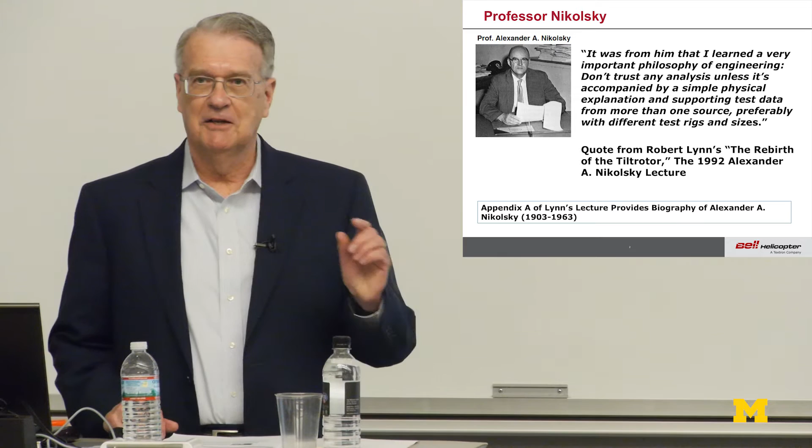So the question is, how has that fared over the years? Because one thing we wanted to do was constantly improve our analysis. And just for the future, one of you individuals sitting out here today may be giving this lecture in the future. And if you ever want to know who Professor Nikolsky is, you can go to Bob Lynn's 1992 Nikolsky lecture, and there's Appendix A in there that completely talks about Professor Nikolsky.

However, we made a mistake. At the time, we didn't know we made a mistake, of course. But what we did, when you look at the tail rotor, if this is a vertical fin, we always have a sign convention. Which way is the top blade going? Is the top blade going forward, or is the top blade going aft? So it depends on which way you orient the tail rotor.

So unfortunately, we made it so the top blade was going forward. We thought that was really cool. We'd couple up with the dynamic pressure from the main rotor. It'd be great. However, when we were in Vietnam, we quickly learned that when we had a tailwind, we had a real problem. We had a control problem.

And we lost a lot of tail rotor thrust. So finally we began to understand that the ground vortex that's formed on an aircraft when you're in rearward flight can actually subtract from the dynamic pressure of the tail rotor. So we're in a pickle. We need a design change quick.

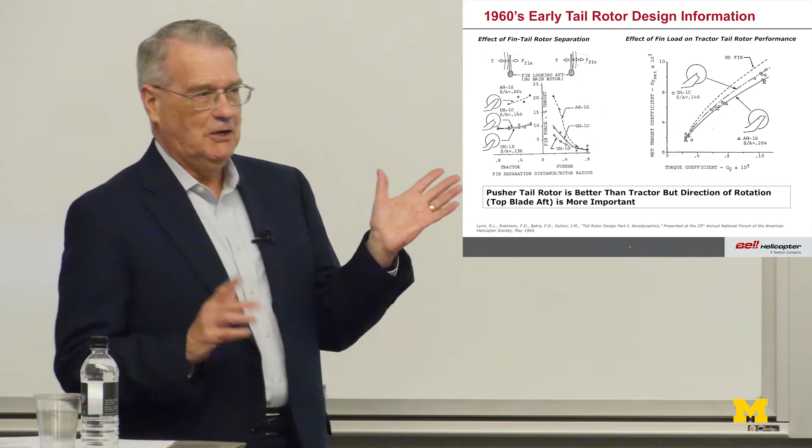So being innovative, someone thought of—it wasn't me—that what we would do is simply flip the tail rotor from the pusher side to the tractor side. That had two advantages: I got a top blade going aft on the tail rotor, and I didn't have to change the gearbox. So just by flipping it over, we were able to solve that problem. We learned a valuable lesson: from then on, tail rotors should have the top blade going aft. Today you wouldn't think anything about it because you look in the literature and see that.

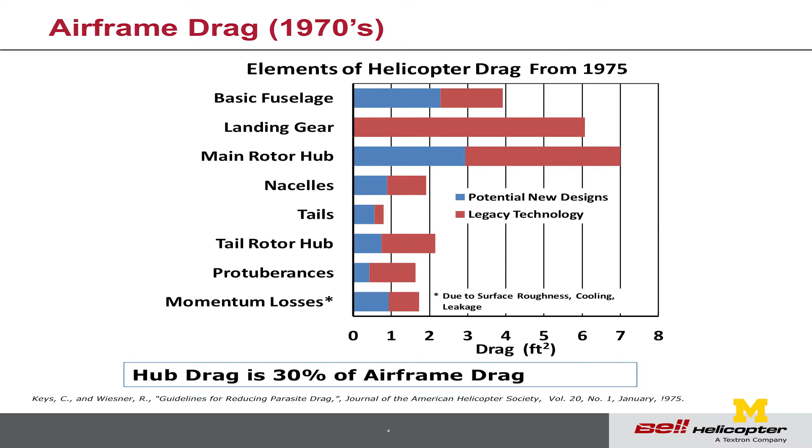Another real important component of helicopter performance is the drag of the fuselage, the drag of the hub, the overall drag of the aircraft. Wiesner and Keys did a really interesting paper in the early 70s where they show the components of helicopter parasite drag. When you look at this, you can see the big offenders: the landing gear, because back in the day we didn't retract it, or we had skid gear. The basic fuselage, main rotor hub, nacelles, tails, tail rotor hub, and protuberances and momentum losses.

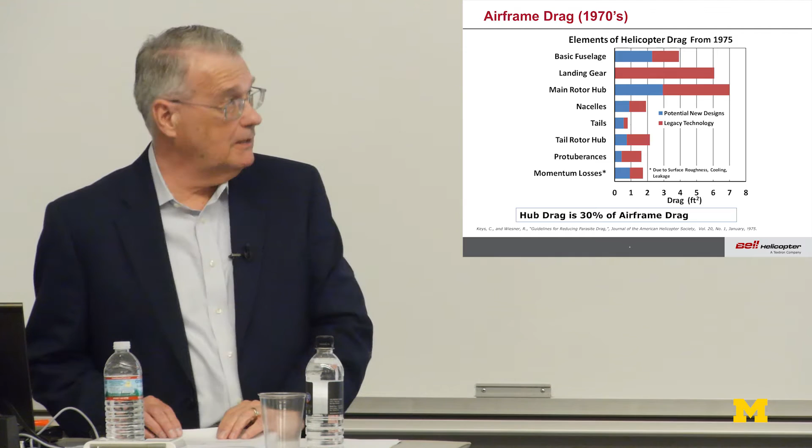In this particular chart, the red is the current status of where we were in 1975. The blue is where they had hoped we could actually get to. Now call your attention to the landing gear—we suck up the gear today, we've sort of worked on that, but you still have a pylon of some kind unless you can make it go into your fuselage. So that piece has been worked on. I want you to look at the main rotor hub, because through the history of the next few years I'm going to show you that the hub keeps coming up as people look at it. So the interesting part is, what is that drag? You can see that drag is a big player in the parasite drag of a helicopter.

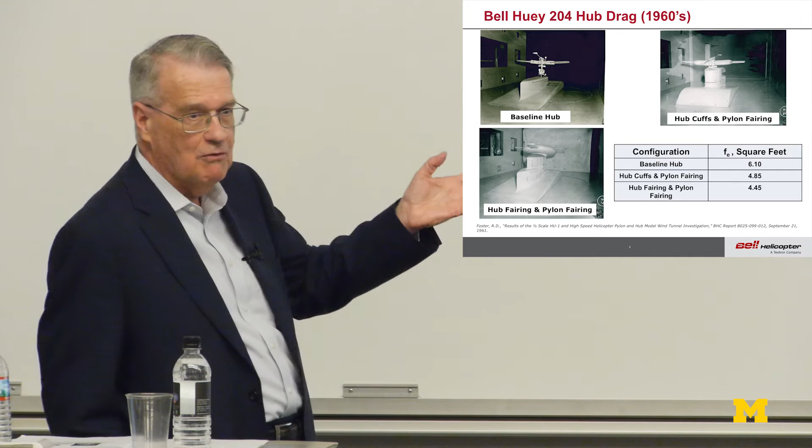So I'm going to look at some of the early stuff that we did. At Bell in the 60s, we were trying to find out how to get a helicopter to really go fast. We took the conventional two-bladed rotor, shown in the upper left-hand slide, and we tried different things. We put a pylon that would cover up the rotating controls, we put fairings around the cuff, we even put this giant ellipsoid on there. You can see in the lower right-hand side the effect—we made about 1.5 foot gain out of that. However, with all that stuff up there, the pilot can no longer see the rotating controls, and he can no longer check to see if there are any interferences. As a result, it never made it onto an airplane, never went into production. So that information was out there.

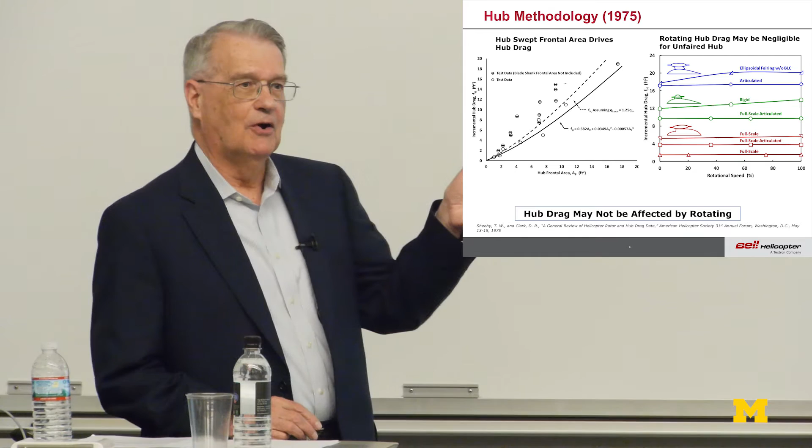If you go to the mid-70s, Tom Sheehy from Sikorsky did an in-depth study of what really affects hub drag. On the left you can see the hub frontal area versus the incremental drag, and what he determined was that if you take the profile area, you could pretty much estimate it. However, there was a big controversy about whether you needed to rotate the hub in the wind tunnel test, or if you could just do it statically and index the hub. When he looked at it, there was a variable answer there—he wasn't sure what to say about that. At that point he concluded that hub drag may not be affected by rotation, because if you rotate, you have a more complicated test to run.

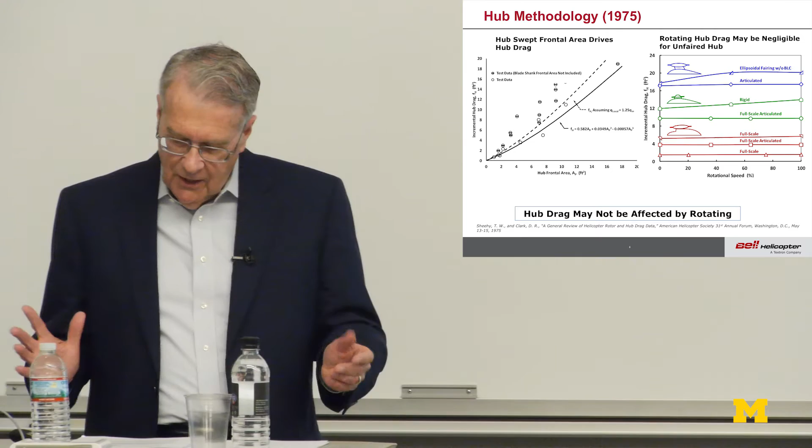So we talked about the hub—how do we do this? We always had these small scale tests, depending on where you test. If you're in a 7x10 tunnel, it's usually a fifth-scale model. So let's look at some small scale stuff. At Bell, we had the Model 222.

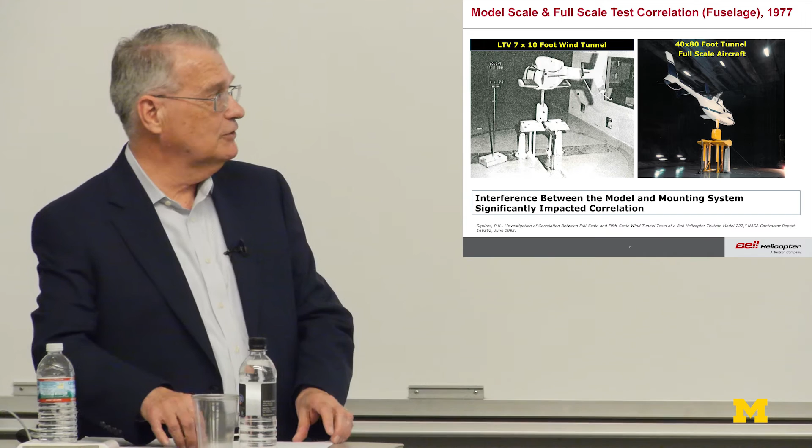So we came back and asked ourselves, what could be wrong? Well, anybody that does force and moment tests knows about tares and interferences. You have to do the image—you've got to flip it upside down and get your model data. So we went back to the LTV wind tunnel, 7x10, and we actually built exactly the same mounting system that was used in the 40x80 wind tunnel. We did tares and interferences on that test, and we flipped it upside down.

Once we did that, we correlated very closely with the wind tunnel data between the small scale and the large scale wind tunnel. So the lesson learned here is you really have to do tares and interferences, and you really have to pay attention to how that thing is mounted in the wind tunnel, even if you're in the 40x80.

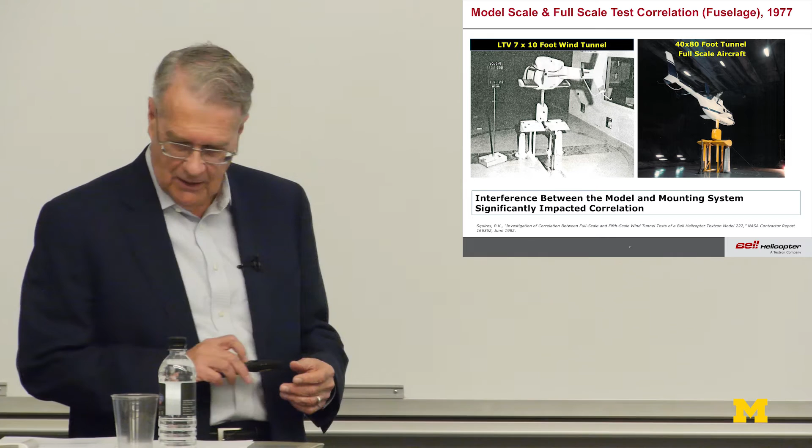So we talked a lot about drag and determining that. Now let's talk a little bit about performance.

In the late 60s and early 70s, the only performance data we really had was momentum theory, a Gessow and Myers type approach. We used to have some factors that we would apply to the induced power and things of that nature. So we got to looking at two places.

Two places you're really interested in calculating performance are the minimum power—in the speed power bucket where the power is minimum. That has two significances. One, that's where you do all your rate of climb testing to see how fast you can climb. The second thing: if you're a twin-engine aircraft, that's how you determine your single-engine stay-up capability. It's really important because, early on, you promised somebody this airplane could stay up single-engine to 4,000 feet on a standard day. So if you miss that power, you can really be in trouble.

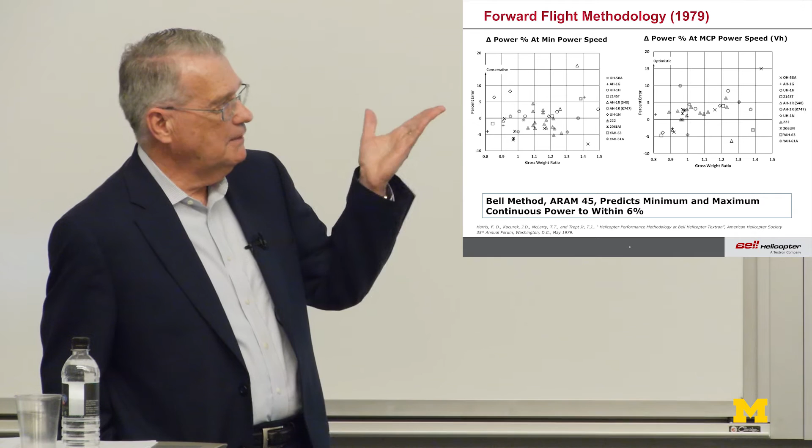So we went and looked at a bunch of things. We put some trim models in our code, but it was still momentum theory. As you can see in the minimum power case, we were maybe close to a 3 to 5% problem. In the forward flight case, we were overly optimistic by about 6%. So this was still a big problem for us, and we really wanted to understand what we needed to change in the methodology for forward flight.

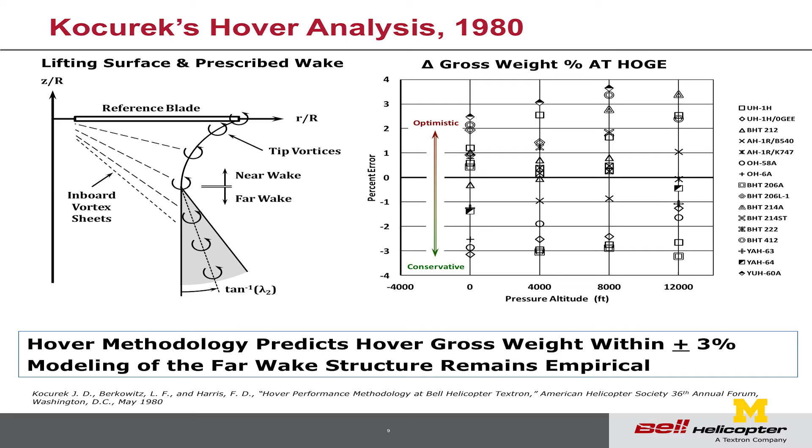However, before I go there, I want to talk a little bit about hover data. Remember, our early hover models were simply momentum theory. The thing you have to realize about momentum theory is that it captures the fundamentals of the flow really well, but it gives you no details of the flow. You can have a stream tube and know how much momentum passed through it, but you don't know how it's distributed inside that stream tube from momentum theory.

So Landgrebe at Sikorsky, Tangler at Bell, and Kocurek at Bell spent a lot of time and visualized flow—took a lot of tufting and other flow pictures—and we began to see how the rotor wake actually contracts and then diffuses again. This is what we began to develop, based on the aspect ratio of the blades, number of blades, and different parameters, to try to come up with a prescribed wake. A prescribed wake means you tell it what it looks like, but you don't calculate a wake—you just position it, and thereby you get the correct inflow angle at the rotor blade in hover. At that time, it was sort of expensive to run this, so we tried to get workarounds.

But anyway, we went to work on it, and we thought that we could pretty much get our hover methodology to give us the actual gross weight at a given altitude that I could actually lift in flight test within about plus or minus 3%, which was fairly decent at that time.

One thing that Kocurek found, since I was always in handling qualities early in my career and I designed tail rotors, was that a main rotor is like probably 16 to 17 aspect ratio. A tail rotor is an aspect ratio of 5 to 6.

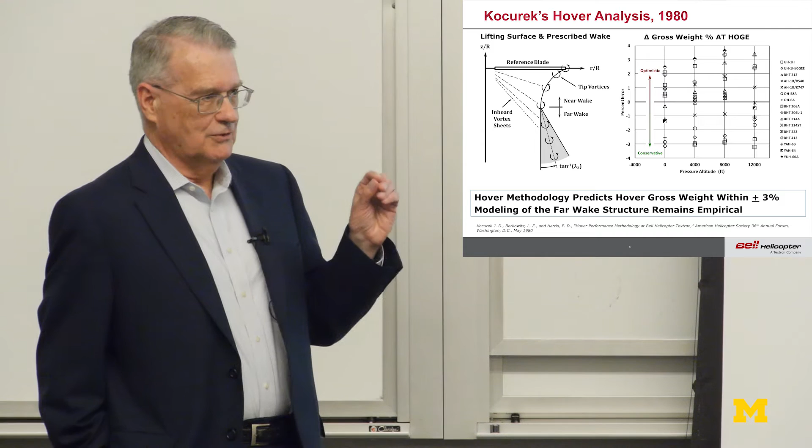So when you design it, so you could get the thrust and power right, you could figure that out, but could you figure out the blade angle? What Kocurek's code did that our momentum code could never do was change the lift curve slope properly so we could actually calculate the required blade angle to go sideward flight correctly.

So aspect ratio is a big deal when you're doing tail rotors, and you need to make sure you understand that issue when you calculate the blade angle. Because remember, you design a rotor hub, the blade fits in the hub, whatever you design in, that's all you get at the end of the day. You don't get to throw it away and go buy a new hub. Program managers get real upset about that if you tell them that.

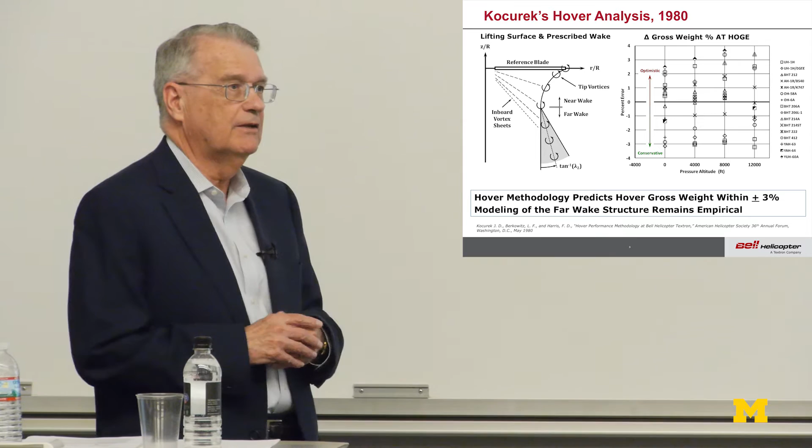So now I'm going to switch to a subject that's a little different, because there are usually many static tests you can run, many qualification tests that we ran on aircraft, and many pieces that go into aircraft design and actually flying the airplane. However, sometimes you really have to go into the dynamic environment, and we're going to talk about something I had to do in that dynamic environment.

So in the early '80s, we started getting a lot of reports and reading in the media about something called tail rotor stall and tail rotor breakaway. There were certain situations where people believed the tail rotor was actually stalling on them, and some people thought the tail rotor quit producing thrust when it stalled. And so there was a lot of stuff came out.

So suddenly the Army changed the emergency procedure that said if you start spinning to the right out of control, you should reduce your collective pitch, which will reduce the torque. You reduce left pedal, which meant I want to spin faster to the right - I never could understand that one. And then you apply forward cyclic to try to fly out of it.

The thing that bothered us a lot was that we had fully qualified this airplane. We knew we had enough control power on the tail rotor. We hadn't experienced any tail rotor stall. So we couldn't understand exactly what was going on.

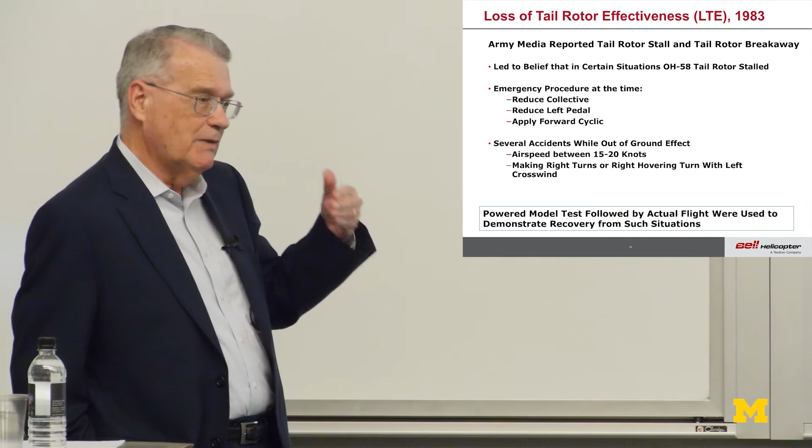There were several accidents that were really bothersome to us, and that was if you're at an airspeed between 15 and 20 knots, and you were making right hovering turns, people seemed to lose control of their airplane.

So imagine, one that I investigated - they were flying around a gravel pit up in Kansas someplace, and there was some bad activity going on in the gravel pit, so these guys wanted to see what was going on. So they flipped around, did a right turn there, and they were so busy looking out of the airplane they weren't paying attention to where the wind was coming from. And they spun out of control and crashed.

So the Army came to Bell and said, would you investigate this? So we got to asking ourselves the question, how would you actually investigate this? I said we need a powered model of some kind that had a main rotor, a tail rotor, a fuselage, so that we could begin to look and see what was going on with the airplane. So I needed a powered model to do this.

Anybody who's ever built a powered model knows it takes a long time. The best we've ever done at Bell is about 18 months. Well, I didn't have 18 months. Everybody thinks all this autonomous UAV stuff is brand new and never been done, but that's not true, because I bought the world's champion 206B RC model from the world champion for a few bucks. And what I did is I put it in the wind tunnel.

I stuck this thing on a pole, and we went to this wind tunnel test, and spun this thing. This is about 20 degrees per second yaw rate as you go around.

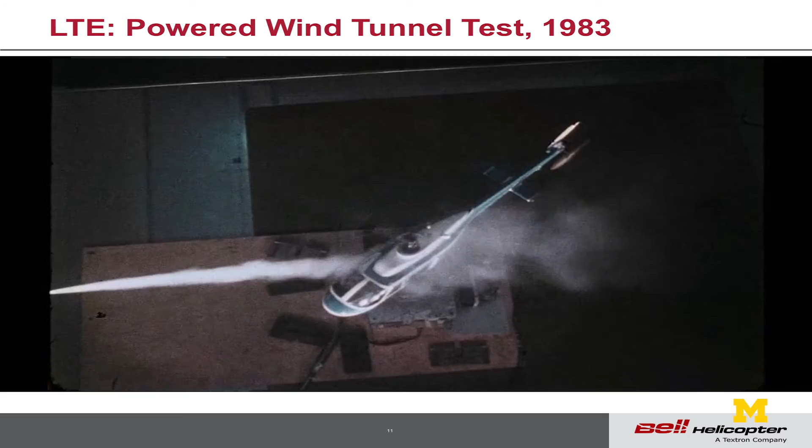I scaled the velocity to be the main rotor tip speed, an equivalent speed. And I put the wind right on the edge of the rotor, so you can see how the tip vortex of the main rotor blade actually affects the tail rotor.

From this, we began to look and say, okay, what are the real contributors to it? We noticed from the wind tunnel, you can see on the left-hand side, the main rotor tip vortex is a region where the tip vortex will actually intersect the tail rotor.

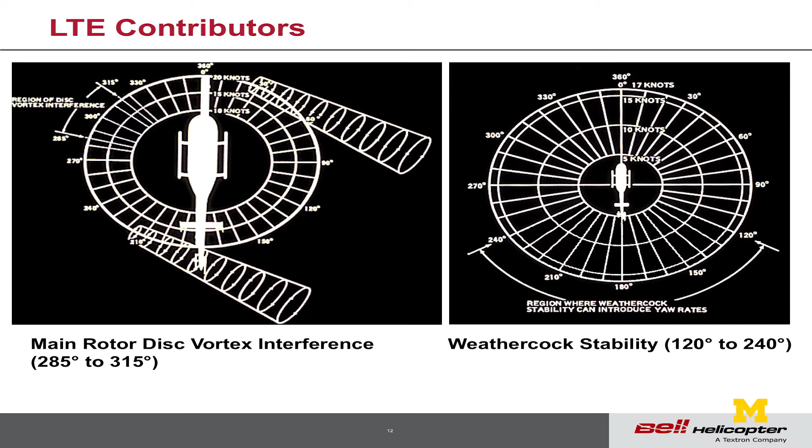So what was that wind zone? That wind zone, depending on airspeed, can vary a little bit between 315 and 285 azimuth.

Think about azimuth. What does azimuth mean? Straight ahead is either 0 or 360. This is 270. If it's coming up your tail, it's 180. If it's coming off the right side, it's 90. Just think about you're sitting on a compass, and that's the way you read this. Then these are speed bands in between.

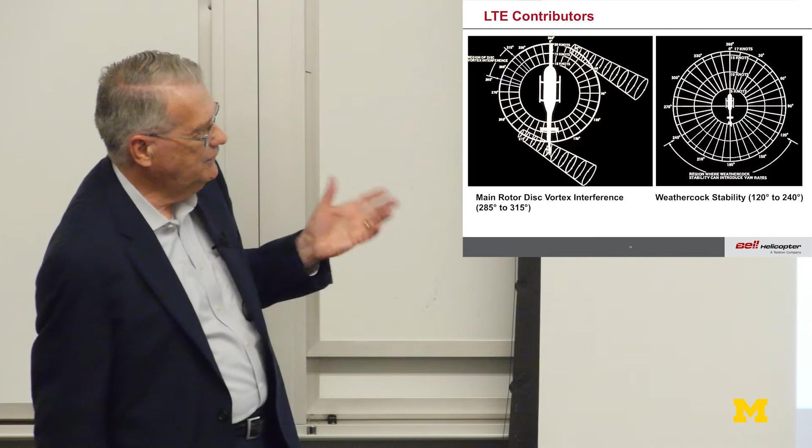So basically, we found the main rotor disc protects on the right side. We had this thing called weathercock stability. If you've heard of stability control, you put a vertical fin on a tail rotor or airplane to keep it aligned to the relative wind. And that's what it does.

So basically, if the wind was from the rear, from 120 to 240, the aircraft would want to turn around, nose into the wind, which was exactly what it was designed to do.

Then the other issue out there is tail rotor vortex ring state. There's been tons of literature on tail rotor vortex ring state. We're going to talk about it.

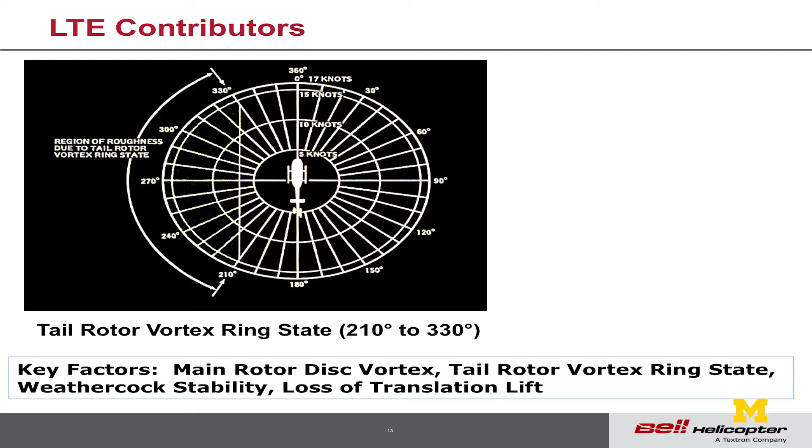In a tail rotor, what happens is you get into a certain zone from 210 up to 330 degrees at certain speeds. Basically, when the tail rotor wake becomes trapped behind the tail rotor itself, it'll begin to oscillate. It will actually break away, and then the pilot will have to make a control input to regain control of the aircraft.

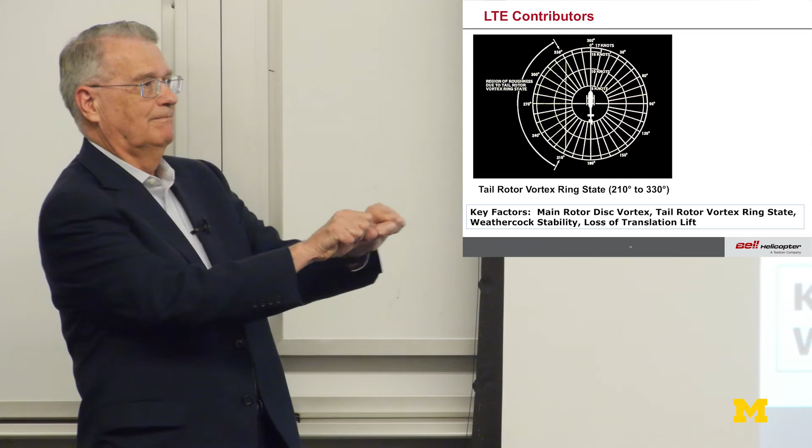So what happens if you're flying the aircraft and I tell you to point it right there: from the 270 condition, the pilot will have to move his feet like this to try to hold that heading. He won't be able to hold it very precisely, but he will be able to hold the heading.

And we know all this because fundamentally we've done flight tests on this forever. Other people had looked at that too. Wiesner and Sheridan at Boeing had done a lot of work.

So now let's see the results of what was causing this phenomenon called loss of tail rotor effectiveness. Along the x-axis down here, we have where the wind is coming from: 360 or zero is out the nose, 270 the left side, 180 off your tail, 90 off your right side.

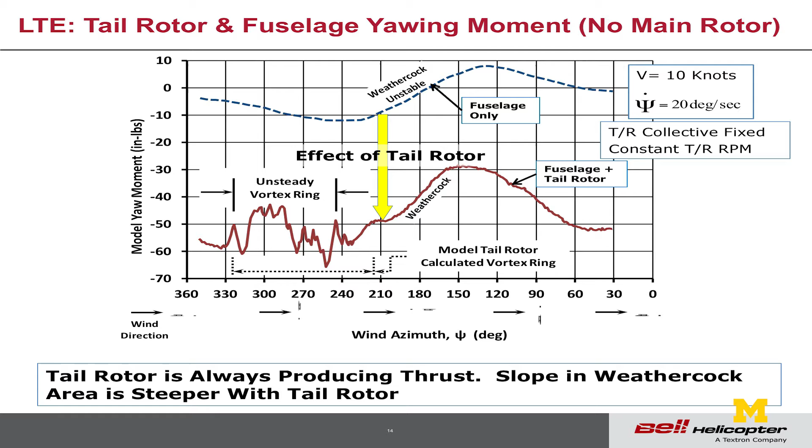So if you think about a tail rotor, we ran this test with collective fixed. So the only thing that was changing on the tail rotor itself is the inflow angle. Or if you're thinking about a fixed wing, what's the induced angle out the back—in our rotorcraft world, we call it inflow angle.

So basically, the upper dashed blue line is what the fuselage was contributing without the rotors. The red line represents just the tail rotor only, without the main rotor. You can see here that at a fixed collective pitch, all the way around the azimuth, the tail rotor really never stopped producing thrust.

However, you can see the unsteady region right there where the vortex ring state was, and then you can see where the aircraft got into weathercock stability. You can see that the slope of the weathercock stability was steeper with the tail rotor on than with the tail rotor off.

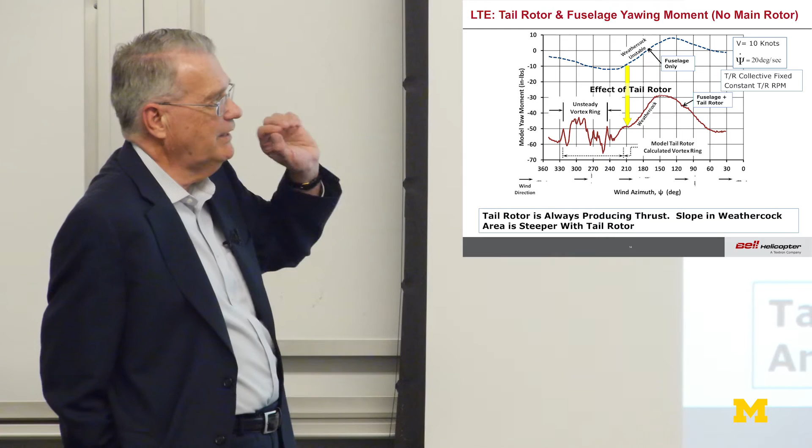So that was something we'd really never thought about. Basically, what happens is if you rotate into that area, you will actually accelerate quicker than just the basic fin, because of the tail rotor inflow angle changing during that time. So this is okay.

So we were answering the questions for the Army. We put the main rotor on and repeated the same test. This is at 10 knots, with a psi dot, yaw rate at 20 degrees per second.

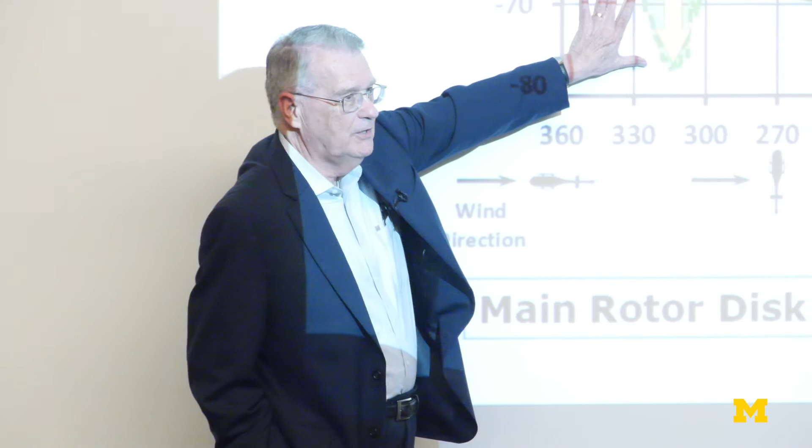About that time, the main rotor tip vortex got on the other side of the tail rotor, changed the induced flow of the tail rotor, and suddenly accelerated him. He wasn't expecting that acceleration. Then he quickly rotates through the tail rotor vortex ring state. That didn't really change. Went back into the weathercock stability and came out.

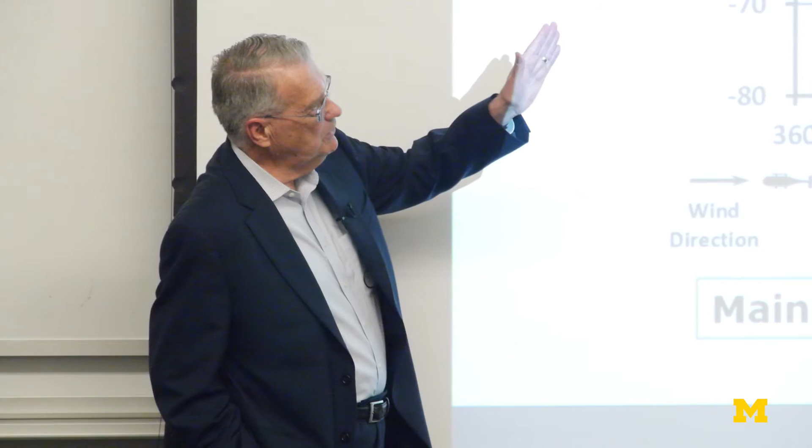So I said, okay, we got this settled, we have this solved. Well, the Army said, not so quick. He says, this is a wind tunnel test and we do not understand — was it right or was it not right? So they said, we really, really want you to go fly this in the helicopter, okay?

So as we're getting ready to go flying, I can remember my boss at the time, Jan Dries. In fact, I found this note where he wrote me in my files that said, whatever you do, do not crash the helicopter. You talk about putting pressure on you, that put pressure on you, okay?

So then the question was, okay, how do I do this? So basically, the team went together and we put together an aircraft, an OH-58. We fundamentally went and put a low-speed system in it so we know where the wind's from, and we instrumented it up.

Anybody that's ever done flight tests knows for a helicopter, you want zero wind. Well, this is one of the few times where I had to wait around for wind. I needed a steady wind to actually do this test. So in this case, we waited around and we had a steady wind of about 16 knots, which is pretty stout from a wind. And we went out and we did a right hovering turn.

Now, I got to tell you, most pilots made fun of us. Most pilots say, this is not what's going on. You know, there was a lot of deal. So I had to talk to my pilot, who's a good friend of mine — we did a lot of testing together. I said, you have to learn to let the aircraft get away from you. In other words, you have to not be the ace pilot you think you are. You have to be a sloppy pilot and be distracted and let the airplane actually get away from you.

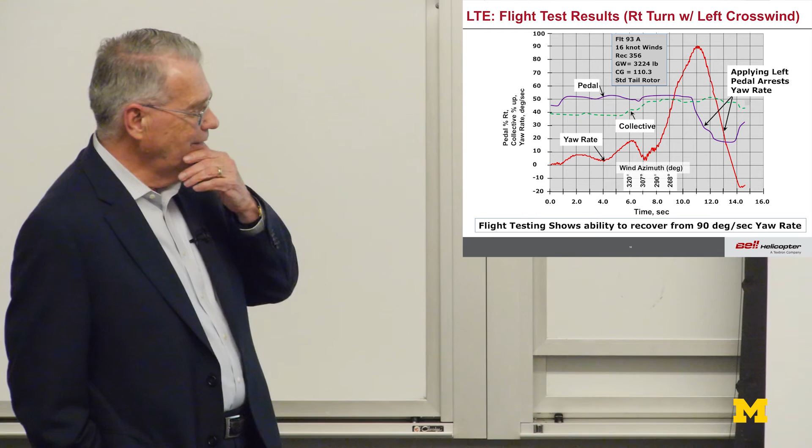So here we have several parameters plotted. Red is the yaw rate in degrees per second. The pedal is the purple, it's in percent, right? And the collective pitch is there as percent up. So you can see we went in there, we did the little test, and lo and behold, we actually accelerated up to 90 degrees per second yaw rate. And we were able to recover successfully all the way back to minus 15 degrees yaw rate.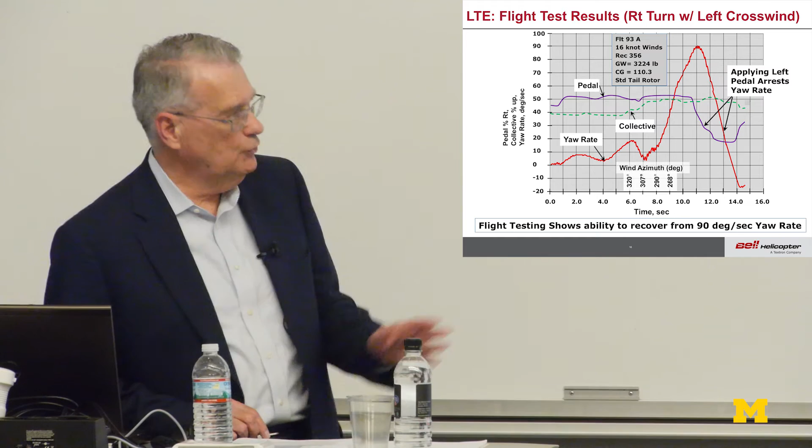So the pilot got a little more confidence out of that. He understood he had to actually let the aircraft go. So we actually went out on the runway and we did up to 90 degrees per second yaw rate, at which time the pilot was becoming disoriented visually from spinning around.

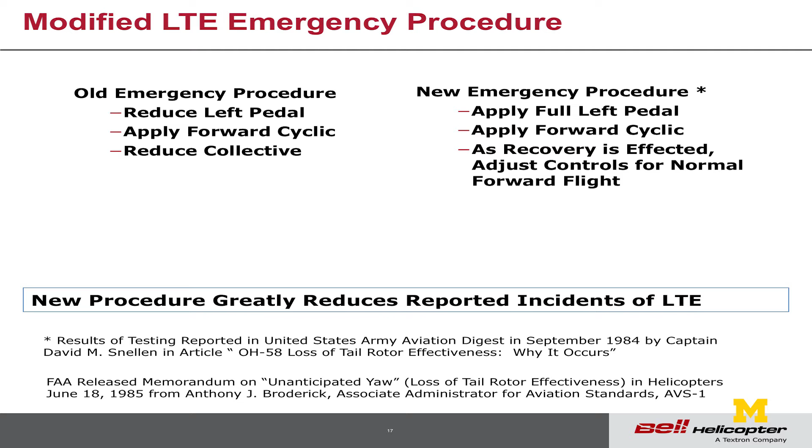The old emergency procedure says reduce left pedal, apply forward cyclic, reduce collective. The new emergency procedure, and we proved this to the Army, was apply full left pedal till you arrest the yaw rate, apply forward cyclic pitch, and as recovery is effected, then you adjust the controls for normal flight. And so basically, we actually found the answer to the question.

The new procedure did it. The Army wrote about it. Basically what it came down to, the Army put out a training film: when you're doing these turns and everything, flying the airplane - are you flying the airplane, or is the wind flying the airplane? As a result of that, the number of incidents really went away. No one could say the tail rotor was stalling anymore.

So we managed to resolve that. I'm going to move on to some performance questions that we actually had here. So Frank Harris, I invited him to come to an aero session. We had a specialist meeting at the American Helicopter Society in Arlington, and he wrote quite an epistle that he put out there. Basically, he went and took some data.

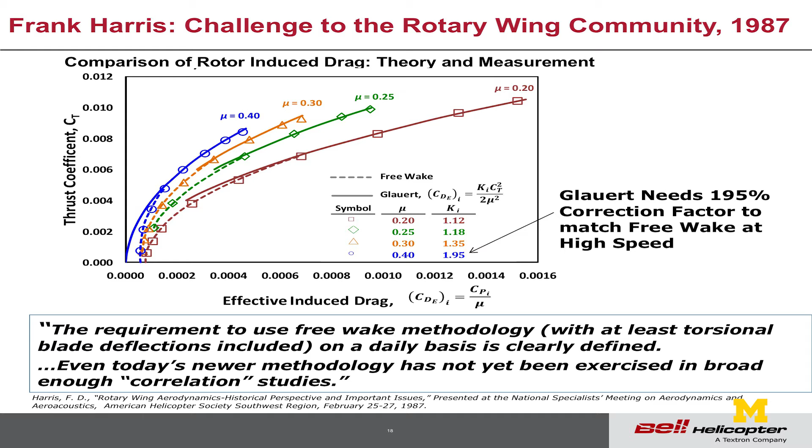We took some data from a 40 by 80 wind tunnel test of an S-76 rotor, and you can see the thrust coefficient versus the effective induced drag. The question was, how well do the test points line up with what Glauert said, and what Wayne Johnson ran with his CAMRAD code, which had Dr. Mike Scully's free wake in it. As you can see, the free wake was doing really good.

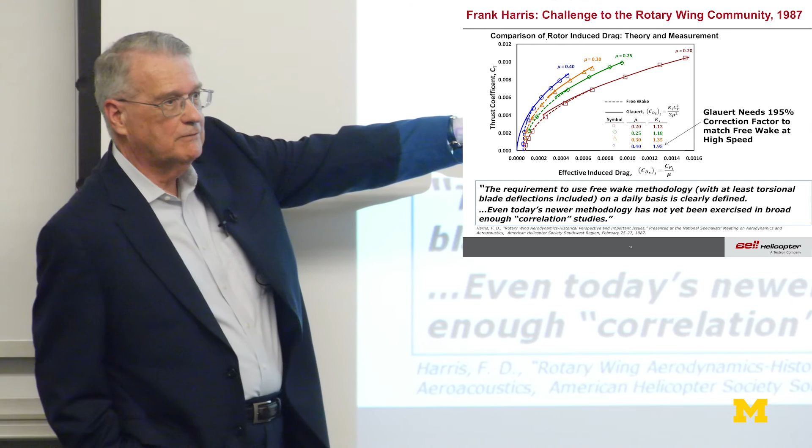I want to call your attention to the Glauert K factors. K factor at a mu of 0.4 was 1.95. So I said, if you look at his time, they thought that induced power went way down with forward flight. This shows induced power starts to come back up as advance ratio goes up.

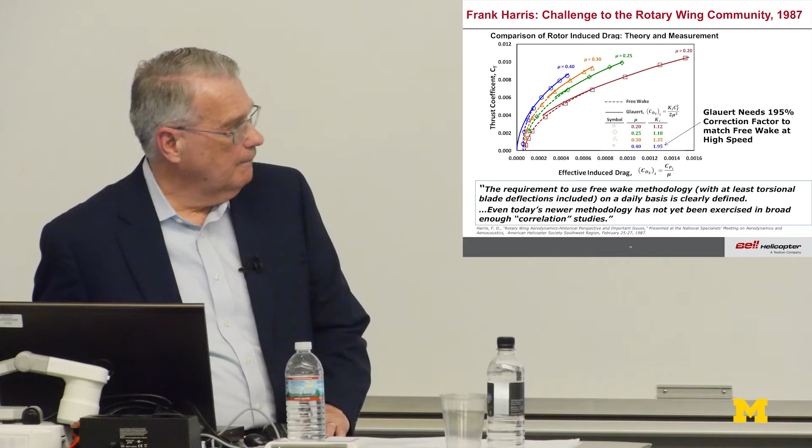And that was a significant finding, and there were a lot of obvious questions about that. So then along came Charlie Crawford. He gave us a report. Anybody that knows Charlie Crawford knows that he ran the Army evaluation for the UH-60, for the AH-64, and for the OH-58D. So he gave us a report card.

What Charlie's message was, in his Nikolsky lecture in 1989, was we need to improve our analytical capability, guys - we're not doing a good job for the customers. On the upper left, we see that everybody missed hover performance by at least 5%.

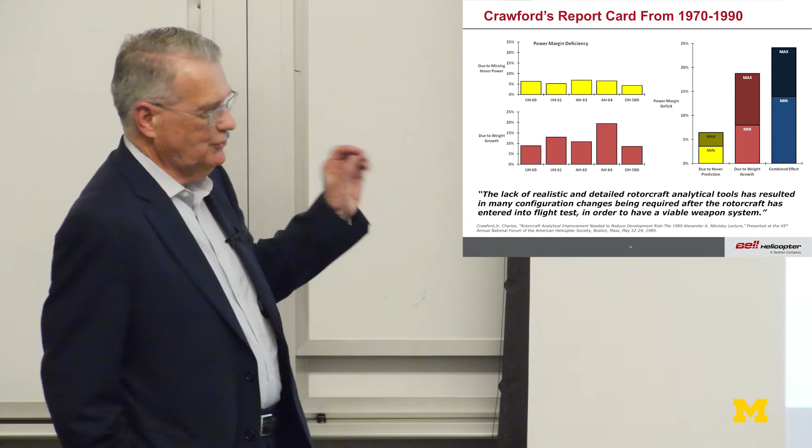Another subject I'm not talking about today - I'll be happy to see a Nikolsky lecture on this - is what's the weight growth. These comparisons are made between what you had in the proposal and what you actually flew at Edwards Air Force Base, so you can see the importance of weight. Weight was a real challenge. The best guy was just under 10%, the worst guy was north of 15%.

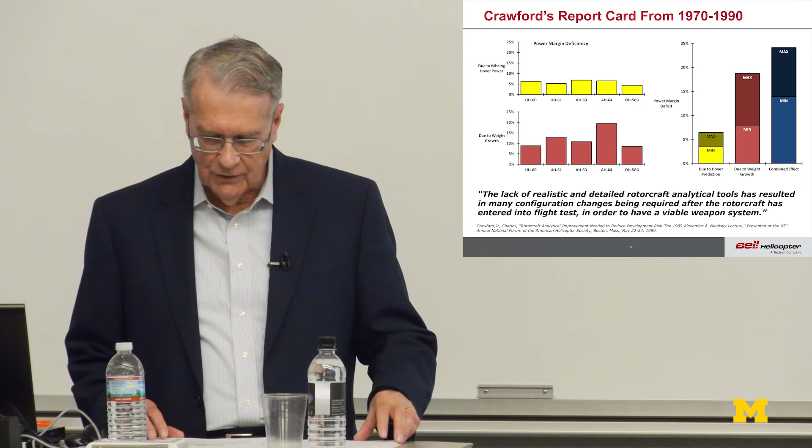So the problem with the customers - remember, I told you at the first onset, your job is to deliver a product that can have a certain performance at the mission weight. As a result of that, when you stack this up, you can see what a challenge we had in those aircraft. None of them really met the spec that was out there, and you can see you could potentially have an error as great as 25%, which would be quite a miss.

So Charlie's message was, something's wrong here, guys. We really fundamentally need to get our analysis up to speed so we know what the real answer is going to be ahead of time.

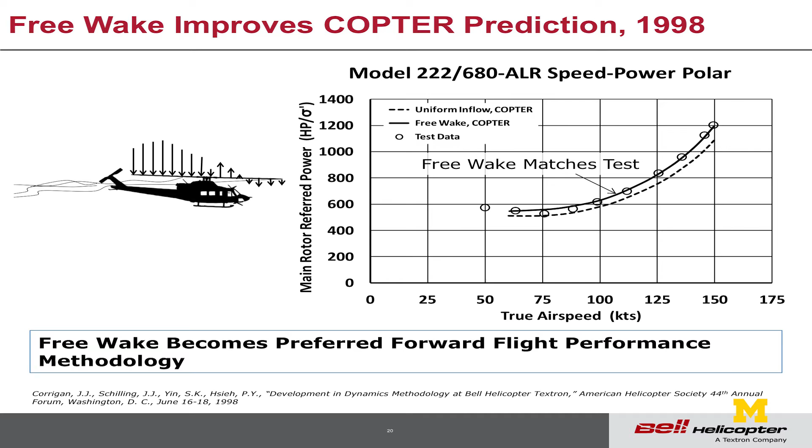So Bell went back, we put the Scully Wake in our COPTER code, which is our code that actually calculates things, and you can see here the solid line goes through the flight test points, as opposed to the dashed line, which is a momentum theory using uniform inflow. Basically, the Scully Wake affects the inflow on the aft part of the rotor, which changed the induced velocity significantly. However, there were a lot of questions about the free wake and how good that actually was.

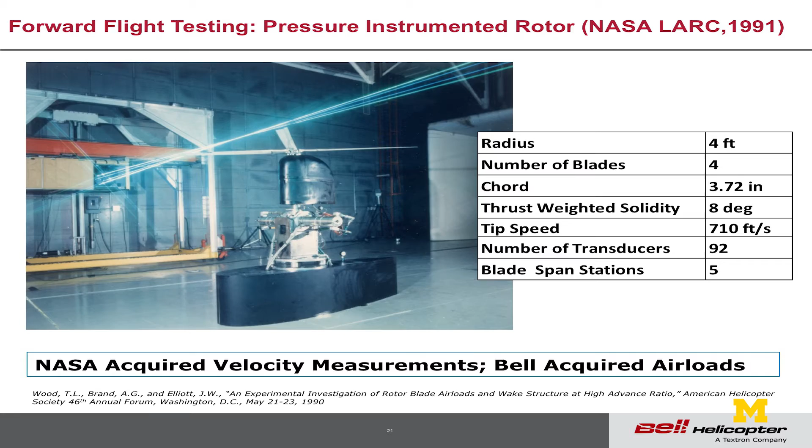So Bell was teamed with NASA, and we actually made a model rotor and took it to the 14 by 22 with NASA. At that time, NASA was actually trying to use laser velocimetry to calculate velocities around the rotor, so we teamed with them. We were going to get air loads - this was a pressure instrumented rotor, and we wanted to see how well we were measuring what the wake was doing.

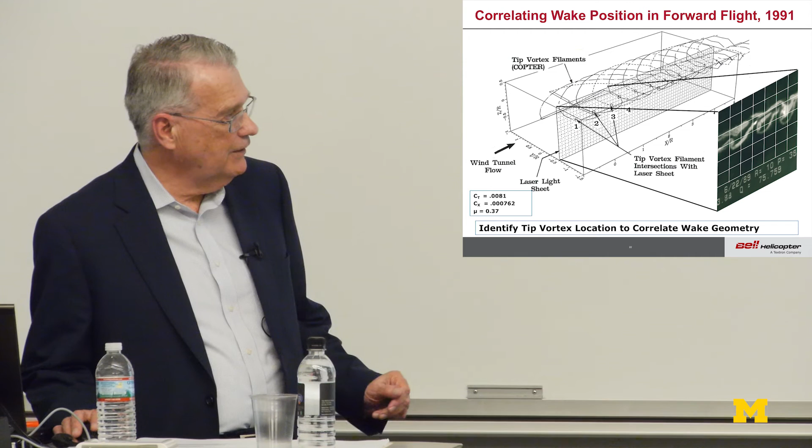So the question is, okay, we could identify the tip vortex. Let's see how well we did with our predictions. You can see between the circles is where I thought I would find a vortex. The solid dots are where I actually found one. On the back part of the rotor, we were pretty good, we could identify the core locations. However, in the front, we were very disappointed. We were way high, and at first we did not understand what was going on.

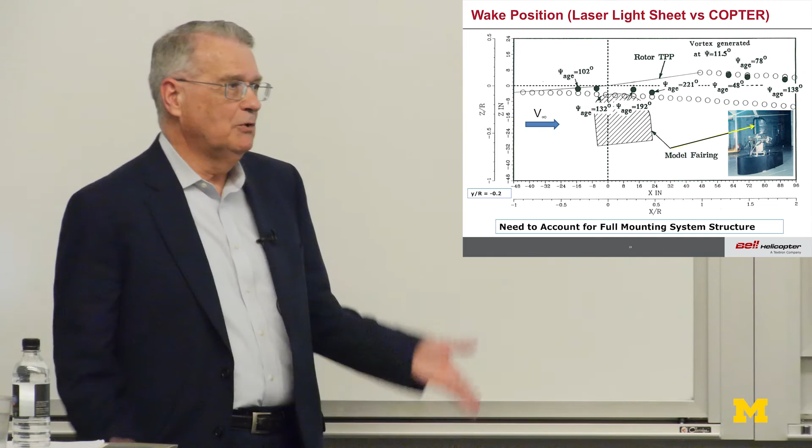So then we remembered our deal about paying attention to the mounting system. We went back, ran a VSAERO model, and found out that the fairing at the bottom actually made an upwash that moved up the rotor, weighting the front part of the disc itself.

Meanwhile, the types of rotors kept evolving, and Bell had come up with a bearingless rotor. NASA wanted to test it and find out if they could reduce the hub drag. As a result, they ran this wind tunnel test. You can see they tried pretty much the same thing, a large fairing, even a big cone on top. So let's look at the results of that.

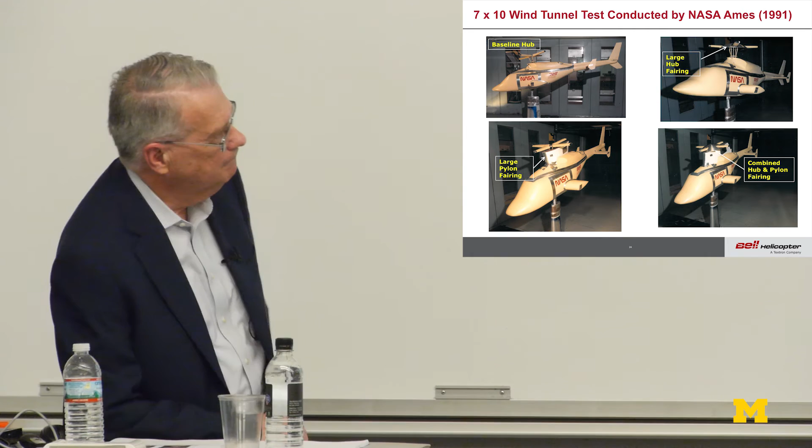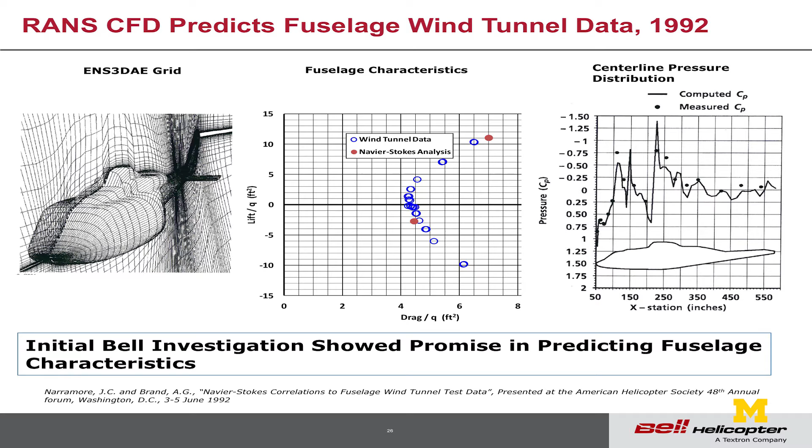In 1992 at Bell, we started trying to predict a fuselage using a half-span representation. As you can see, we did pretty good. We got a couple data points in red compared to the blue, and we were pretty good on the centerline pressure. However, it took about several months to run this, so in the design cycle that was not going to actually work.

So the question was, how do I actually use CFD in the design process? I established a policy where I would make them pre-predict what was going to happen in the wind tunnel. If you pre-predict, I'll put it in my lockbox, you go run the wind tunnel test, you come out, we compare, we have a conversation. They did that. They did not match the forces and moments. At this time we were using Overflow, which had a structured grid that took a very long time to do. But once they got the grid correct, they matched the forces and moments.

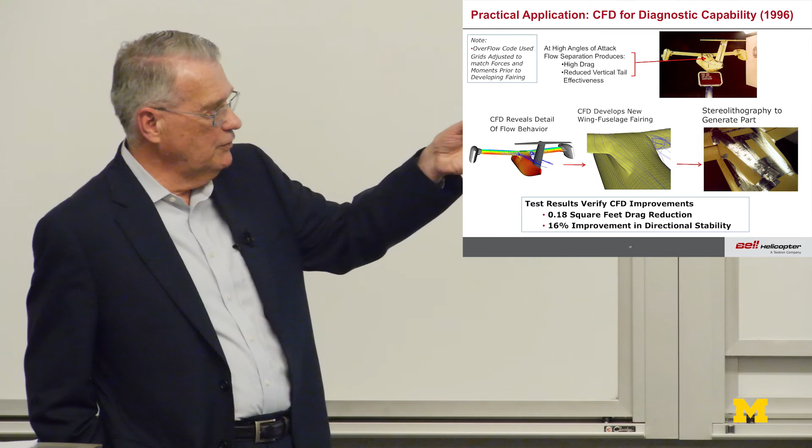Then I said, okay, I have a couple of problems right here. I have an angle of attack issue in the upper right, and I have high drag that is separating and reducing my fin effectiveness. So tell me what I can do in CFD to fix that problem. They did that, and came up with a different fillet at the wing root. I built that fillet, went back to the wind tunnel, and verified it. The lesson learned here was if I can get the grid right with my CFD guys, I can believe that their fixes are good.

That was a big and very interesting finding, because from then on, when you have flow problems in the wind tunnel, you get your clay out and try to make it look good and all that, but you never really know what it looks like. So the CFD guys can actually really help you out there.

Moving on, then along came the V22, which presented a whole new set of opportunities for aerodynamicists. Anytime you change the configuration significantly from the normal, you begin to find that there's a new set of problems to look at. And that's what makes engineering interesting—there's always new challenges popping up.

There was one set of data—the first time we ever had any hover data on a tilt rotor that was an isolated rotor itself. So we went out there, and NASA ran this, and they have isolated and semi-span download tests as shown here.

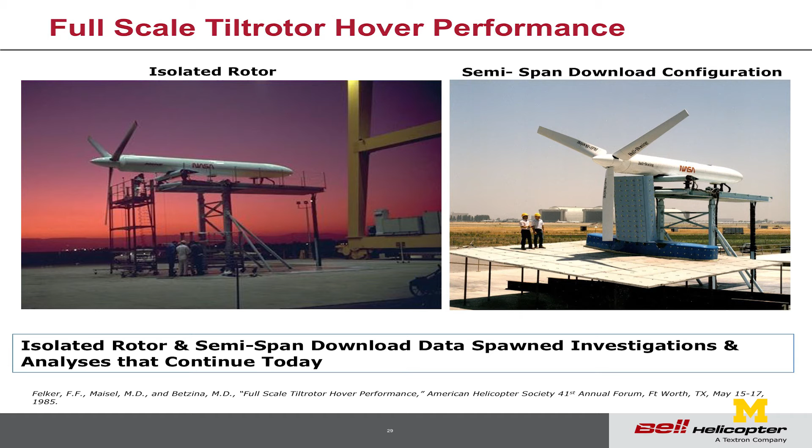This data set has been run so many times, and people have looked at it for so long that even today we're still trying to get better correlation with that data set.

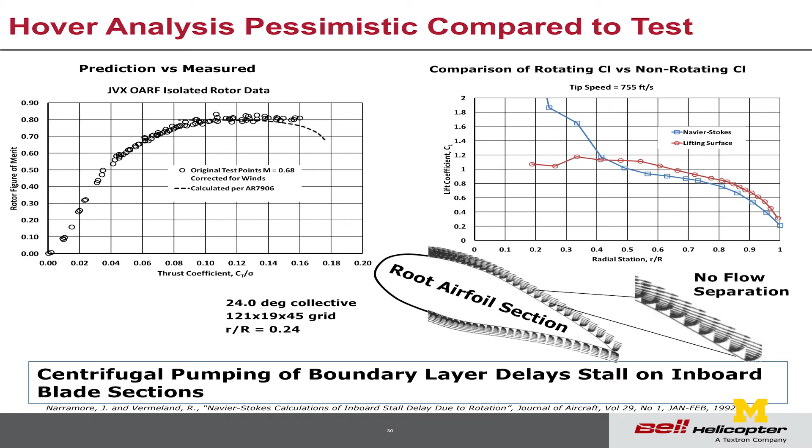So then we went to CFD, and we found a variable that's very different. In a fixed wing, the boundary layer stays stuck to the wing, doesn't rotate - the flow goes up over the boundary layer. In a rotating system, the boundary layer experiences centrifugal pumping, and that energizes the boundary layer, so it actually stays attached.

So what you see right here is a real high angle of attack at the fat end of the rotor blade, and you can see how the flow vectors are still attached.

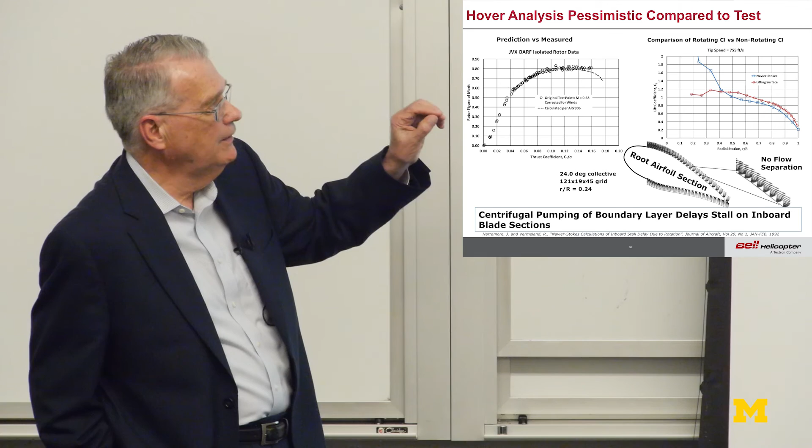What this really did was give us results from the lifting line - the CL as a function of rotor radius. The red line is what the lifting surface would say using 2D airfoil tables, and the CFD showed a really high CL max in there.

And we corrected that, and began to get better correlation with it, but that took a long time to run that CFD model. So the question was, how could you actually put that into your blade element analysis, which uses 2D airfoil data? So we went to work on that.

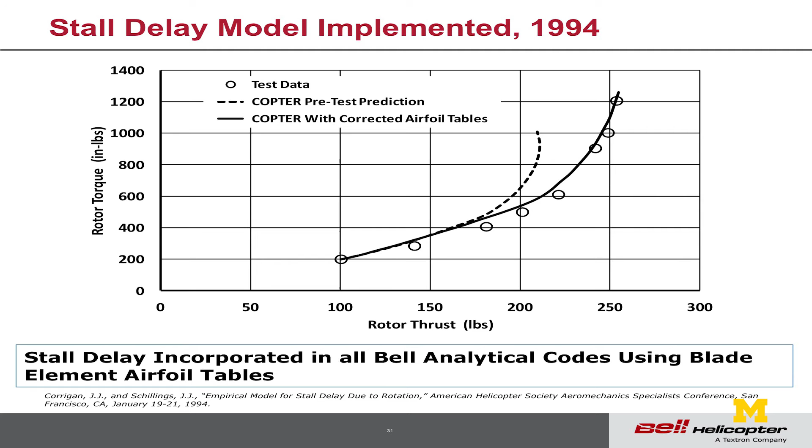We figured out a methodology to put stall delay into the program. What stall delay did was extend the 2D airfoil tables. John Corrigan found some work done by Banks and Gadd, who had found this out from some propellers that they had run. So we came out with a process to do this empirical stall delay, and put it in there.

This is a V22 model, aeroelastic model, about 60 knots at 60 degrees nacelle. You can see how much improvement there was between test and the data.

So then another area we were always interested in was hover download. Basically, hover download means you have a rotor pushing force down on the fuselage. So the question was, what could we do about it?

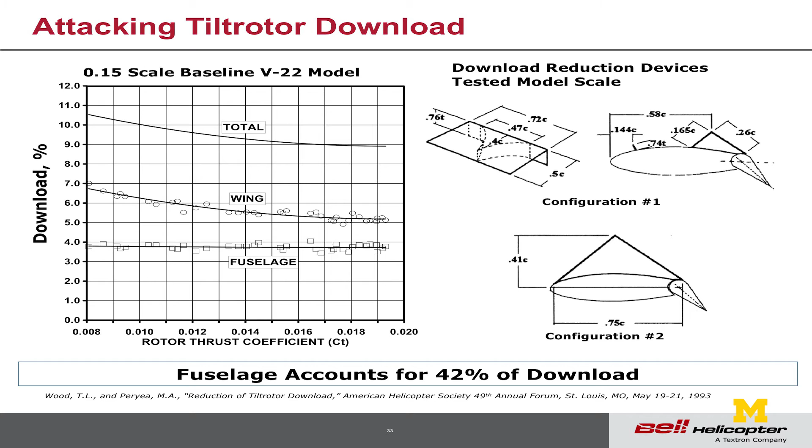So we actually went back and repeated, at small scale, the OARF data. And when we did that, we found we could agree with what they had measured on OARF. So we went to work to find out what we could really do to make the flow do something different.

So we had two configurations. Configuration one had a flow diverter, where we tried to make the flow go this way. We put a prism back there trying to help the flap, and a fence on the front. Then we went really wild and made this giant prism. So the question was, what happens there?

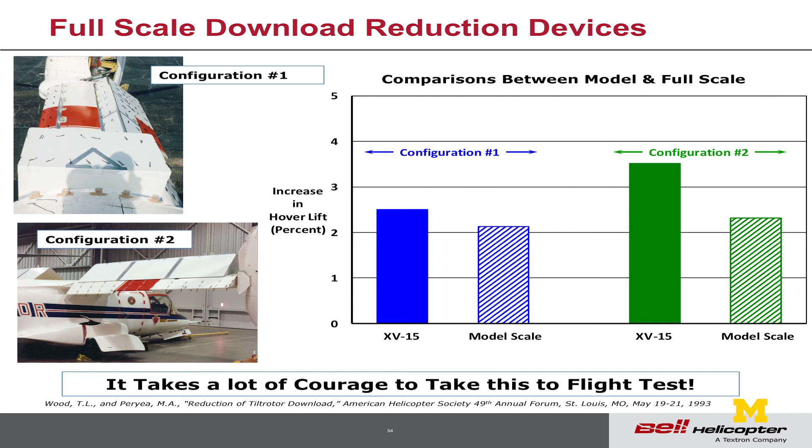But then when I'm briefing this, I'm asking myself, this looks pretty stupid - why did I really take this to flight test? It really takes a lot of courage sometimes to go experiment in flight tests with strange looking stuff.

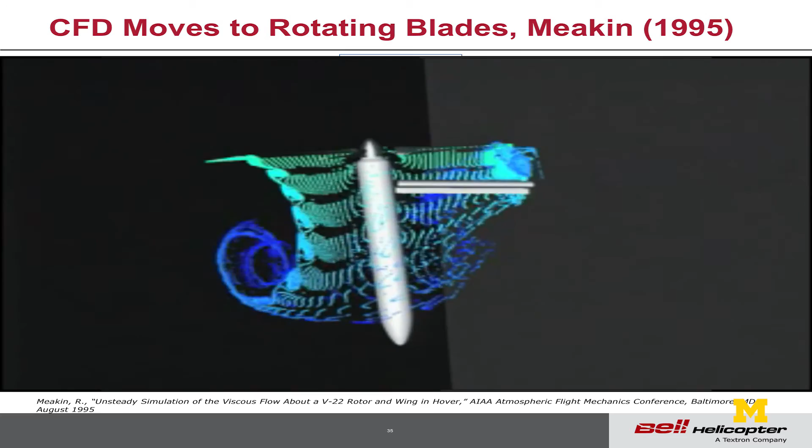So then Meakin, in this time frame, went and actually ran a rotor, and he found that he could try to simulate this. Remember, there's an image plane on the left, the free edge of the rotor's on the right, just like from the OARF test. This thing ran for months.

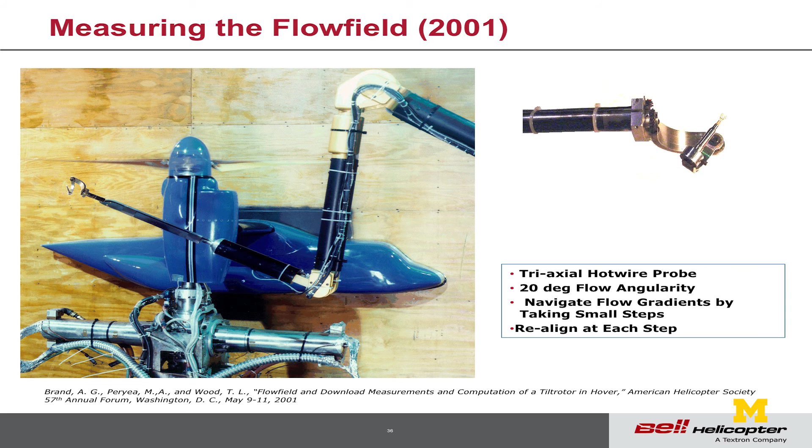Meanwhile at Bell, we tried to measure the flow using a triaxial probe. We knew the angularity of the probe, so we took very small steps underneath the rotor, making sure we were always in alignment from step to step to get good measurements for the probe itself.

And this is the results of that - this is the time variant on the right. We're going to calculate the vorticity field. You can see the vortex, and you can see some of the sheet actually falling down in that.

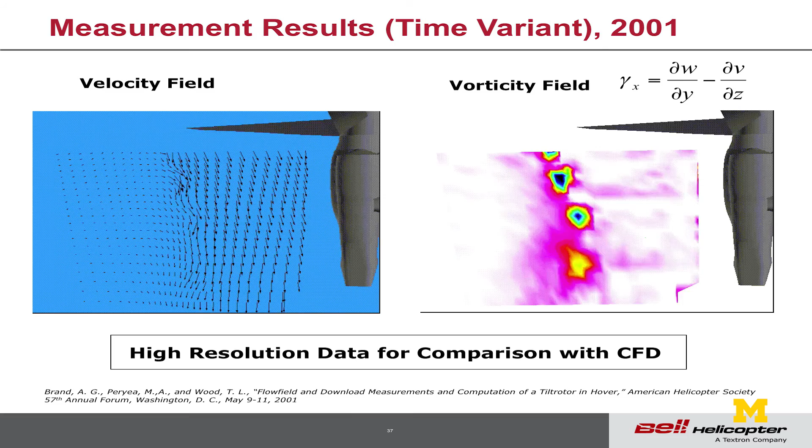So then the question was, okay, what does that really tell me? However, at that time, Professor George at Cornell and Polak had come up with this and said that the structure from an acoustic point of view is not the same. The image plane doesn't really handle the vortex correctly.

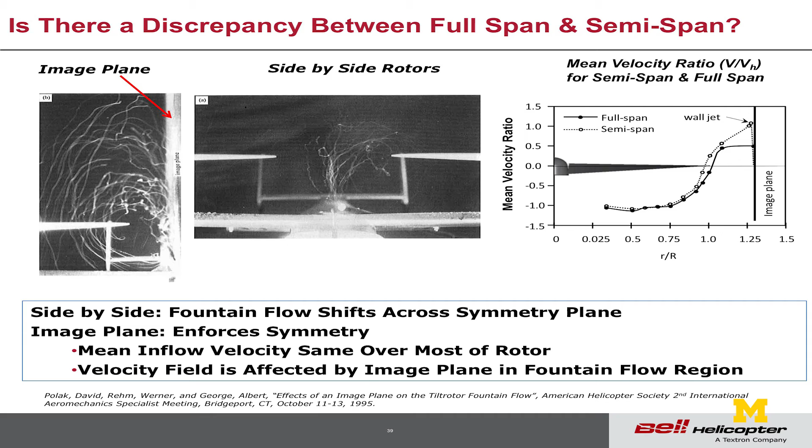On the far left, you can see the vortex recirculates. The one in the middle shows that it goes from side to side. The rotor, because there are two rotors both dropping off, they go back and forth. And we had actually observed that in flight test on the XV-15.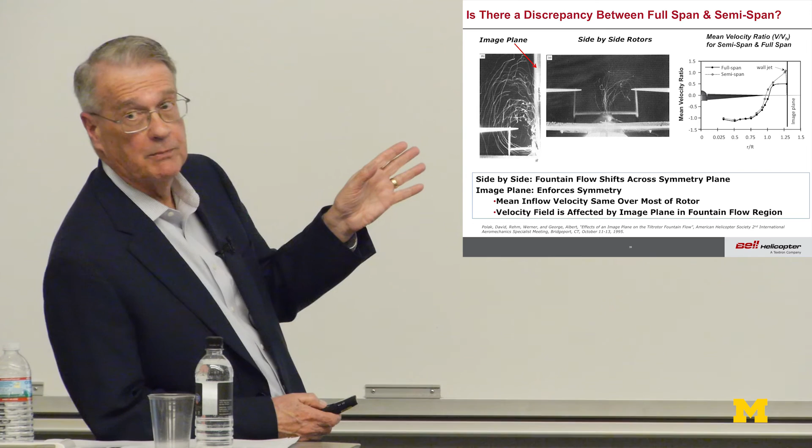On the far right, we see that from a performance point of view, it's had very little effect because the mean induced flow was not changed any. So from the performance point of view, it didn't seem to be a problem. From the acoustics point of view, the vortex interaction is the big driver in acoustics. So that made the difference.

So then Strawn and his team out at Ames began to calculate this using Overflow. They came in and had the half-span model and the full-span model that basically repeated what they had seen from George and Polak in that area. So things are looking up in the CFD world. There are still some issues there that we're still trying to work.

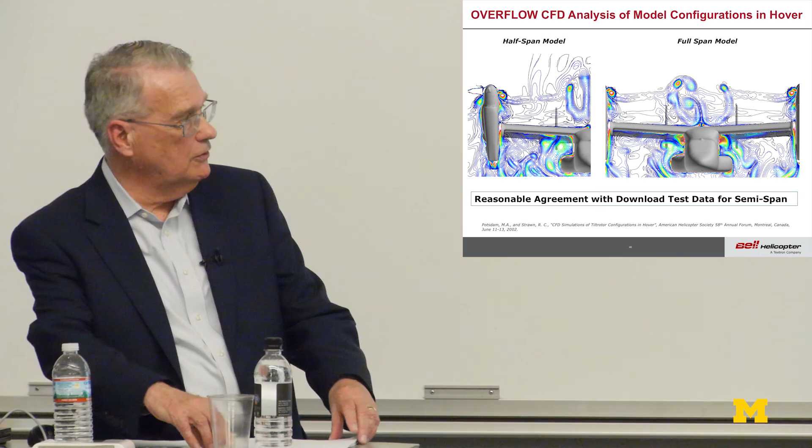But meanwhile, we wanted to see, okay, what about active flow control? What's going on in active flow control? So I was working with Professor Wygnanski out at NASA, at University of Arizona. He did 2D simulations, and found this thing called zero mass blowing. Basically, you put momentum in at a certain frequency and magnitude, and take momentum out at the trailing edge, and he could actually affect the vortex structure underneath the wing itself with this.

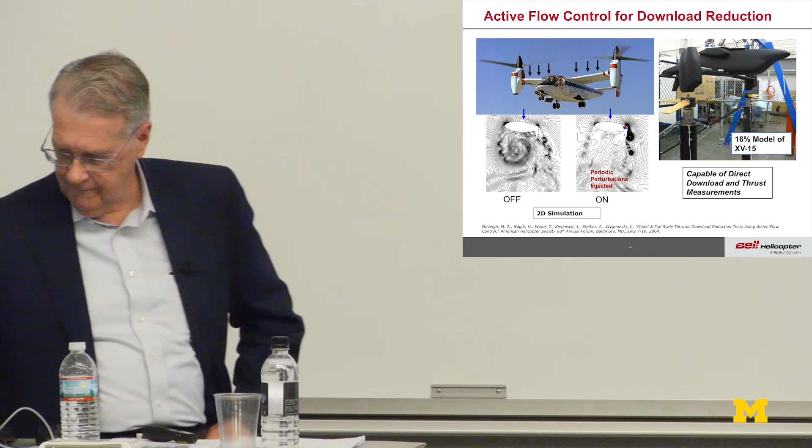So it was encouraging enough that DARPA gave us all a little money, and we were able to go run and see what would really happen. They made actuators like speakers. Remember a speaker like this? They made these actuators and we actually put it in there.

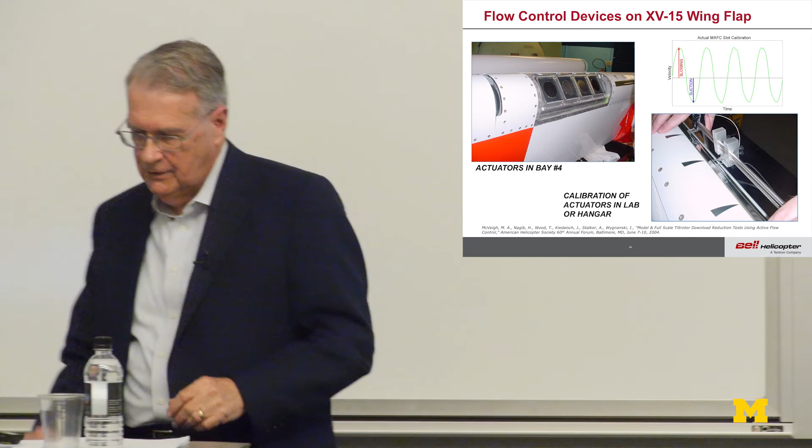The way it worked was you would push air out, you'd suck air in. You push air out, you suck air in. You do that at a certain frequency and a certain amplitude, and then it would attach the flow. So we were able to get a magnitude of this case, and we calibrated it before we went out there. We were getting about 85 meters per second at a frequency of about 50 hertz. So you had to work in the frequency that would actually affect the boundary layer itself.

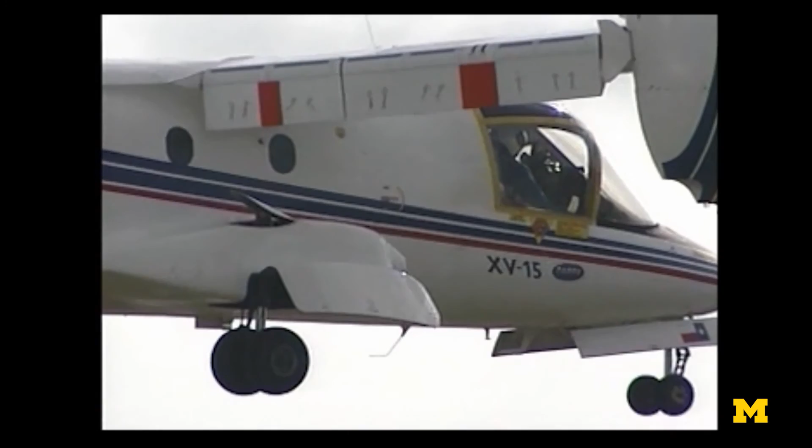We actually went and tested it, and got about 150 pounds improved lift. I'll show you how the flow was actually attached to the wing. Here it's off, you can see the tufts outboard going up on both sides of the aircraft itself. The minute we turn on active flow, you see the tufts are attached.

This was the first test of active flow on a helicopter that we were aware of, and Wiggie's very proud of that. We had a lot of fun doing that particular test.

It was only fitting that the XV-15 took its final resting place in the Smithsonian up there next to the Concorde. We thought it was pretty fitting that the last flight of the XV-15, even though it did many experiments during its time, was really on active flow control.

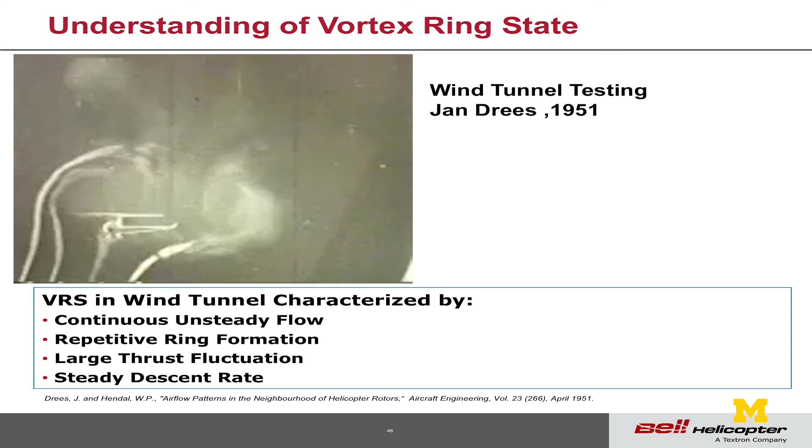Next, we want to talk about vortex ring state as it relates to the V-22. This picture was taken by my boss in 1951, and you can see here the flow breaks up and then it breaks out. That's a repeating flow in the wind tunnel, and the reason is that's fixed, the wind tunnel cannot actually leave.

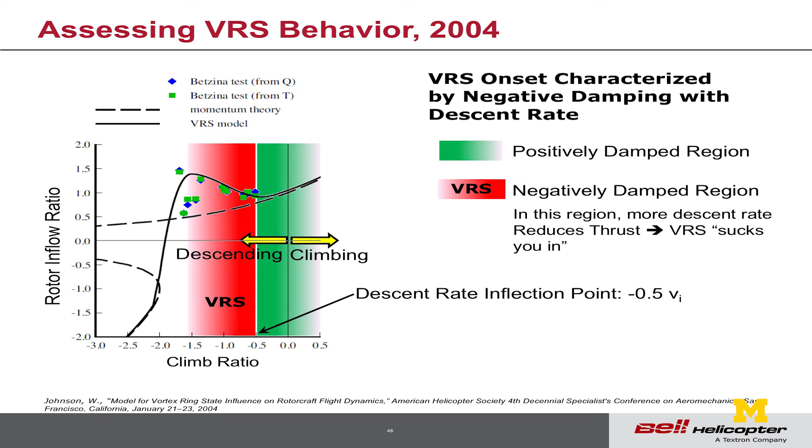He actually characterized all of the VRS tests, of which there were many, and we found out a very interesting thing. There's a certain climb ratio, your sink rate over your induced velocity, where it has positive damping. In other words, if I put up collective, I'm going to get the right response or rate of climb. We found there was a negative region, where it's negative damping. No matter if I pulled up, I would still keep falling. So that was an interesting finding as we went through there.

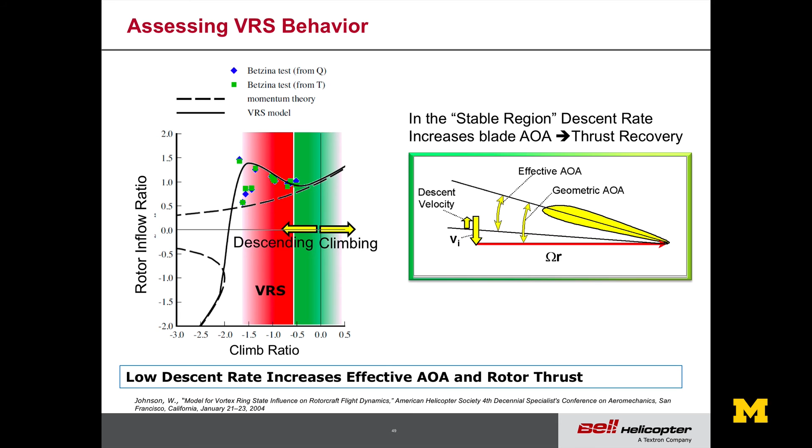Remember, there's a singularity in solving the induced velocity in momentum theory that causes a challenge. So in the green zone, where it's positively damping, when I pull up, my induced angle is corrected and I actually get more thrust, so it doesn't hurt me there. However, if my sink rate is really fast, what happens is negative damping. No matter what I do, the wake getting close to the bottom of the rotor will actually wash out any collective pitch, and you just keep sinking faster and faster. So this is a simple explanation of what really happens.

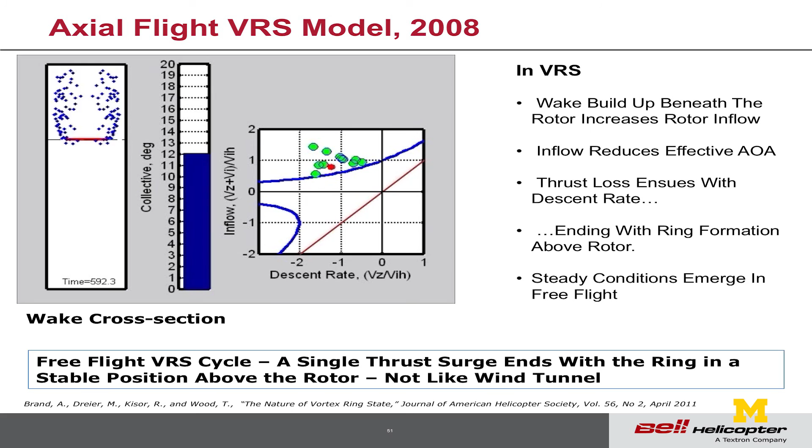The next thing I want to show you, on the left, is our model. Mark Dreier actually went and modeled all these vortexes and showed how it gets up underneath the rotor, and how it will actually break away here in a minute. And then boom - when it booms like that, watch the dancing red dot - the red dot then falls down to a more stable position.

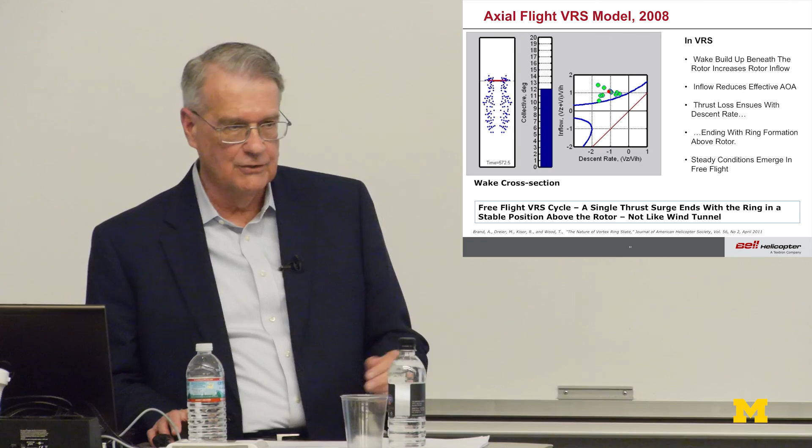So there's a couple things to know that we found out in flight tests. We had to go through a lot of trouble in flight to do it, but there's one thing we learned: rings do not maneuver. You can maneuver away from the ring, but the ring will not follow you in maneuver flight. So with that, obviously you go fly, and then you can maneuver safely by simply changing your flow state and maneuvering away from the rings.

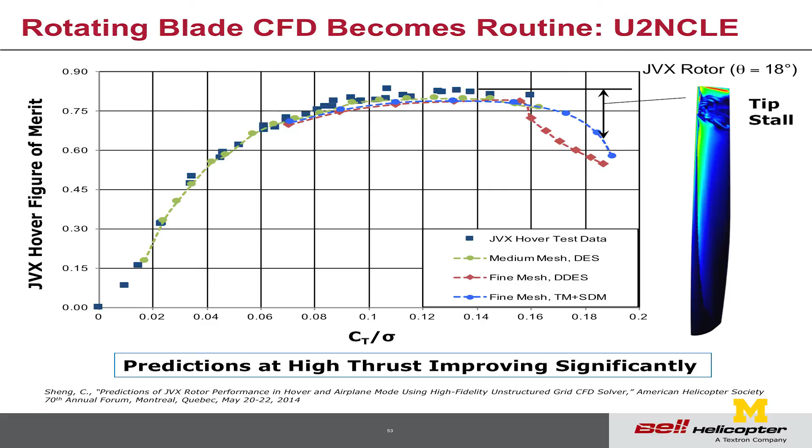Dr. Sheng at University of Toledo has really been working a lot on this, and you can see we really have a problem comparing the measured data with the tip out there. The real question is, look at that tip stall - we actually had tip stall, and he's been trying to work very diligently to do a different treatment in the CFD out at the tip. So if anyone here wants to fix that problem for me, I would definitely appreciate it.

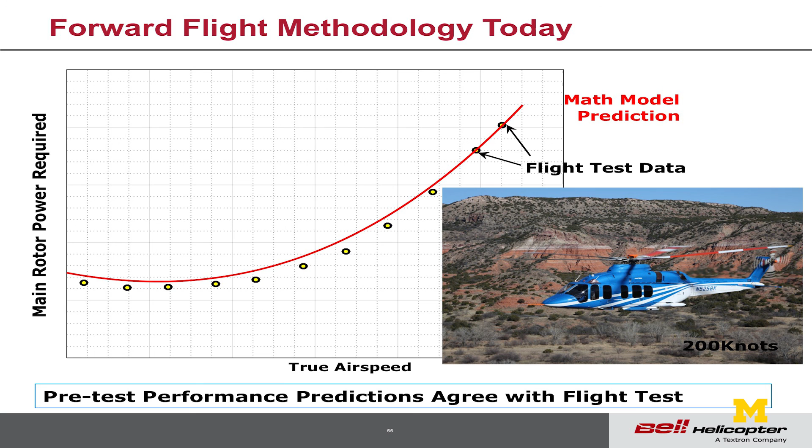So let's see how I'm doing on the 525 - I'm doing okay in forward flight today. So I'm going to give you my perspective: at the end of the day, guess what, analytical capability has really made significant improvements over the years. However, I don't think we're quite to the level of fixed wing yet, so there's still work to be done there.

Rotorcraft will always have uncertainty that will always require flight testing. Wind tunnel tests for fuselage characteristics are not extinct yet. But however, on the positive side for CFD, it can really guide the design today. And then finally, emerging new configurations such as Lightning Strike will have their own challenges and opportunities for all you young engineers to work on. Thank you very much.

There's a lot that goes into testing in environments that are similar to a launch environment. When you have such a violent launch on top of millions of pounds of thrust, ridiculous vibrations - so we actually have a vibration table in the Space Physics Research Laboratory that allows us to shake the...